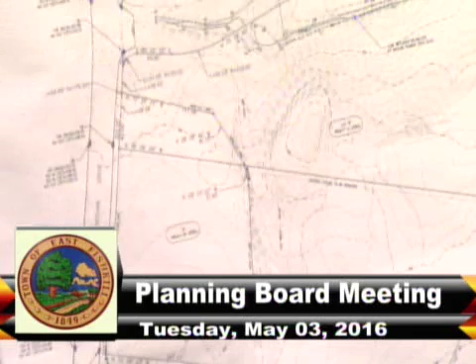All right, let's start over. This is the Brewmation project located off of Donovan Drive. This application actually has two parts: one is a lot line realignment, or subdivision, and the other is a site plan. What we're doing is modifying the lot line between two fairly large parcels, combined about 8 acres, into one larger parcel in the back, and then the Brewmation parcel in the front, identified on this map as parcel A, which is 1.35 acres. The lot line realignment portion is fairly straightforward. I'll move to the site plan.

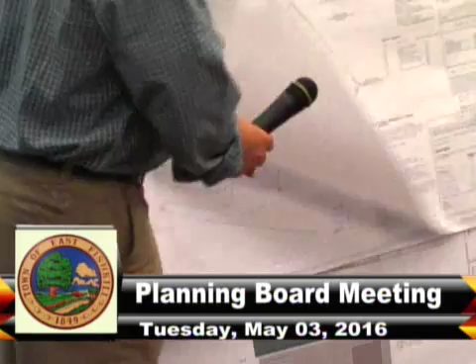If you recall, what we're proposing is a 5,600 square foot building footprint. And it's not totally two floors, there's a portion that's going to be a second floor with some office space and some storage. Altogether it's about mid 9,000 square feet, I think 96, I want to say.

Because of the use, Brewmation is a company that effectively fabricates and assembles controls for breweries. They have an existing facility in Fishkill and are expanding. That's why we're here tonight, looking to buy the property and move forward with their own building. It's a particularly low-use type of operation, and it fits very well with this zone, which is an industrial zone.

We had been before the board on a few occasions relative to the overall layout. We made some changes here and there regarding access and parking. We talked about the fact that while there's a requirement of 23 or 24 spaces, the reality is it's foreseen that it would only be 12.

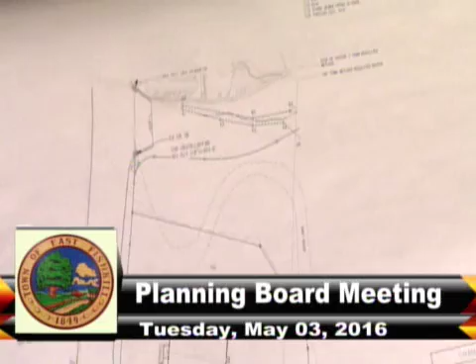One of the more significant changes we've had since the last time we were here was there was a concern regarding the overhead door and parking and maneuverability. Effectively what I did was take the parking spaces, which used to be perpendicular here, and turned them 90 degrees, pulling them to this side. So this opened up this entire area here.

Effectively, these spots in the middle and the spots over here are proposed to be banked. So while the pavement will be there, it won't be striped, which allows for more maneuverability for the truck. I think we're actually proposing one more space than we think we need, so 13 instead of 12.

So the issue was that there's no chance now that a car could be blocked from exiting by a truck, that was the concern. If it backed up here, we have the ability to actually run around the site, this perimeter here. So that kind of solved that issue.

Long story short, there were some comments from the planner and from the town engineer and traffic relative to making sure we had the maneuverability, the turning radiuses, things like that. I'll let Michelle and Joe get detailed into their latest set.

One of the things I do want to mention is one of the challenges that's been on this site has been the drainage. I want to go over that with you briefly to provide some explanation relative to the stormwater plan and why you don't have that yet.

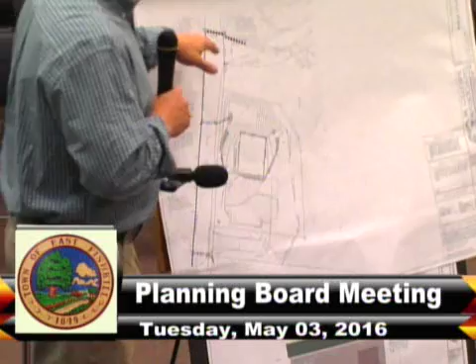As part of this application, we recall the change we made, we took this whole site and shifted it because the future potential access to the rear parcel is now on the southern portion, where before there was an existing right-of-way as part of a filed map on the northern end. There's a pretty significant stream and there are town wetlands up there.

So one of the reasons was to shift everything down to keep it outside the wetland, outside the buffer. The whole site sheets this way. The reality is the easiest way to take this water, once we treat it and discharge it, is to tie it into a location down where the previous future road was. If we do that, we get into piping, installing piping, and what happens is we are now in the buffer. The reality is now we need a permit.

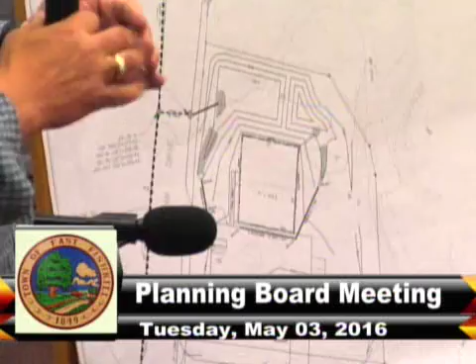What we've been tinkering with is actually taking this, treating the stormwater, bringing it through here, and tying it into this basin, which is located here. Our elevations aren't as great, and I don't want to get super technical with you, but we don't have as much elevation to work with, so it again becomes an issue of trying to play with the numbers and the modeling in order to tighten things up.

But I think one of the reasons we moved the whole project was to stay out of that buffer and stay out of that wetland. I'm confident we can achieve it, but we're still playing with it, and that's where that stands. So I wanted to provide an explanation as to why you don't have that. I know I've talked to Joe about it, we anticipate trying to get it together, but it also has to work.

Let me just ask, so I understand, you're going to use the existing pond, but that's just your outlet, so to speak. You're going to handle all your quantity requirements right here on site, but that just becomes your overflow or your discharge point. Right, there's our quality and our quantity on site.

We talked about one point, as part of the overall subdivision, there's a fairly significant pond located at the front of Donovan Drive. It would have gotten a little complicated to take that water down there, so what we're doing instead, this comes back here and discharges via 60-inch RCP, and then runs down through this stream, down through here.

So, this is the plan of attack, okay? And it keeps us out of buffering, and it's the right way to do it. So that's kind of it. I commend you for trying to protect the buffer and the wetland. Right, yes. Joe, you're good with that?

Yeah, actually, Mike and I plan to meet in a couple days to go over some more of these details, but what I'm hearing so far sounds like a pretty good approach. I think we're going to meet later in the week to go through further detail on it. So, yeah, I think from an overall project perspective, that's probably the best explanation I can give.

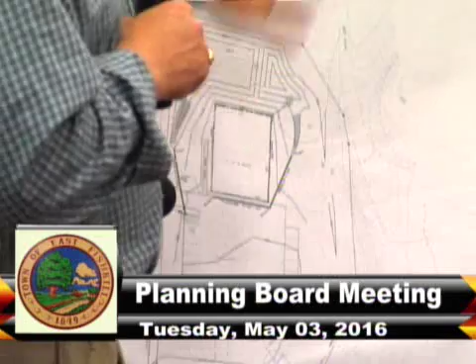When I say elevation, I have all the existing — as part of the overall survey, we took shots on rims, inverts, everything as current, as-built. The issue becomes, if I have an inlet at this location, there's only so far down I could bring this. So in lieu of getting my volume going deeper, I have to go wider. So that's why this is starting to sneak up in here, to try and provide that attenuation volume. This is my critical elevation.

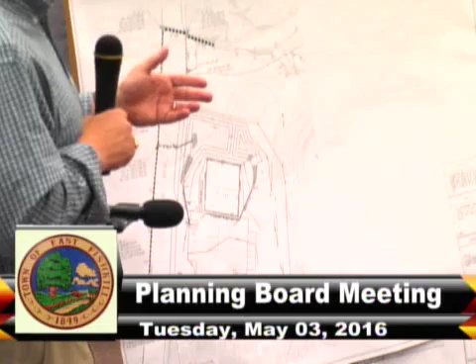Have you done any test pitting at the site? We did soil testing out there. Can you get infiltration there or no? That's part of this, but not a whole lot. The soils, believe it or not — this was an old gravel mine. Do you hit water if you go too deep? Yeah. And the groundwater elevation — there were signs of mottling and so forth when we actually did our tests, so we're constrained by that as well.

Okay, I have a note from HVA Engineers, from David Ellis, saying that all of the conditions and issues he raised have been satisfied. Michelle, any comments? At the last meeting we had asked the applicant to provide a lighting plan and a landscape plan, which they did, and they also showed the location of the sign. I just had a quick question.

It's my understanding that the first entrance is truck only? Correct. Okay, so there's going to be like a truck-only sign there, and then theoretically people will drive in Donovan Drive, and the sign to the actual facility will be at the second entrance, so they know to go in there as their entrance. Correct — deliveries only sign, I would imagine. I think deliveries only is for the first entrance, right?

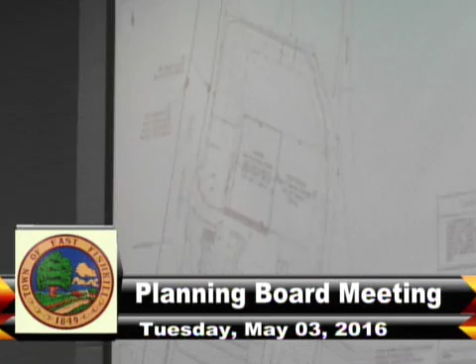And it'll be signed accordingly, right? Deliveries only. And we actually have provided indicated signage on that plan. I think David had indicated maybe changing some of the language on that sign to make sure it's clear whether it's delivery or truck traffic only, whatever it may be, but it's designated as one way in, and then it has to be limited to truck traffic, and obviously do not enter from the other side. So whatever works to satisfy it.

And then they showed a bank of white pines essentially between the daycare center and the driveway, and then some other additional landscaping up front at the building. So all good. Joe?

Yeah, some of these Mike and I covered before. I guess one question I have, though — Mike, the plans you're flipping through there, are those the same as what was submitted to the town, or have you done more work on them? They look slightly different. I think the only thing that's different is on that grading plan, because we've been tinkering with it — nothing else has been modified, but the grading at the pond location has changed a little bit, elevations-wise, grades-wise. In terms of the parking lot, it's the same that you saw.

Our letter goes over a few of the items that he did address, in terms of making specific reference back to the original site plan for Donovan Drive, which is something we asked them to do. They also addressed some circulation and truck movement comments, and included information on environmentally sensitive lands — it looks like he's got way more area than what's necessary between the two lots. They clarified some information on the access easements, and on stormwater, Mike and I will go over that in detail as we get the SWPPP put together.

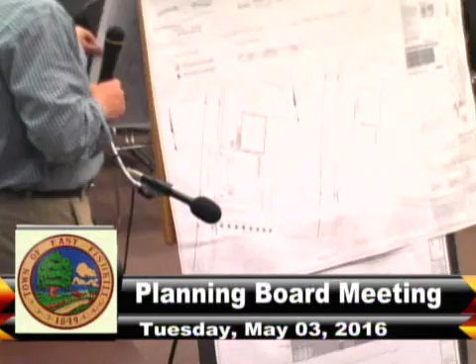As far as the driveways, that two-way main driveway, we were asking to show it in relation to the other driveway to the daycare facility. You have some drainage, a catch basin, and utility boxes right in that corner, and by the time you remove the existing curb and put in the new curb, you might end up disrupting those existing features. So we thought about shifting it a few feet to the north to avoid any disruption.

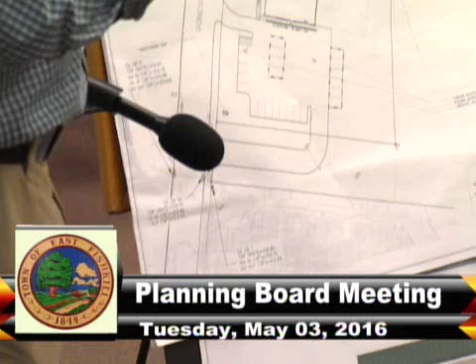The luxury we have here is an extra 10 feet to play with, since this area is actually 60 feet wide. I understand, I did talk to Joe about this, it does get a little tight. Once you lay the radiuses in there, the entrance to the daycare sits just to the south, so once you lay the radiuses and tangent pieces in, it starts to get a little tight. There's also a catch basin here we'll have to adjust to make it work. So to move it even a couple of feet is not a big deal, in order to gain that separation it's really a detailed construction type of thing.

And that's all you're looking for? Yeah, it was just to make it easier for construction more than anything. He kind of centered it right in the middle of the right-of-way, and like you said, he does have a wider right-of-way there. He could shift it a little bit, or at least angle the first entrance part so it's not affecting what's already out there.

Let me add to that - are you planning on putting in a raised concrete curb at the entrance? The concern is with that box sitting just behind it, a raised curb will help protect it to some degree versus just pavement. Yeah, in terms of the site next door, I believe they have curbs. The idea is to get just a drop apron, curb through the front of the apron, but there's not a curb that goes into the school.

The intent was, since this is the main entrance to the facility, to provide for a concrete curb in there, because that would help protect the utility there. Otherwise, you'd have to come up with something else to help protect the bollards.

So are you guys in violent agreement here? Yeah, I think we're fine. It's just that box too - it was shown by the surveyor, but I want to make sure it's correct in terms of dimension, because it looks very big on this plan. It may not be that big, but I think the location is pretty accurate. Right, and I would assume that it would be.

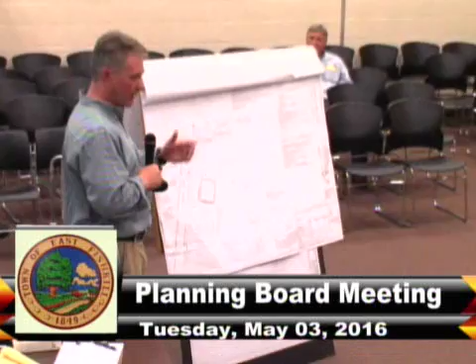So to get an exact measurement on that, because I actually show just the hair of the curb actually tucking - I think we just want to be a little conservative, because with the heavy tractor trailer movements through there, obviously you don't want to be too tight to it.

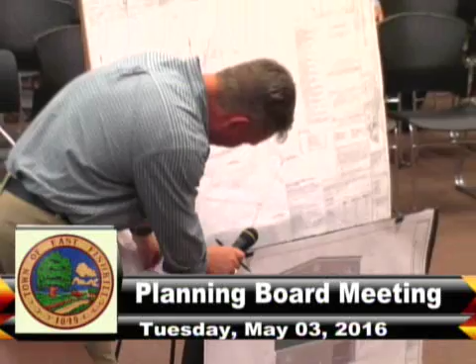Are they shown on that color elevation there? I think the idea for the wall packs was just at the entry locations. Okay, so not on the wall that's facing the wetland, because I was going to ask you if it was going to go on there, to only put it on motion sensor on that wall. Nothing's facing that area, there's no access, there's no entry, there's no anything.

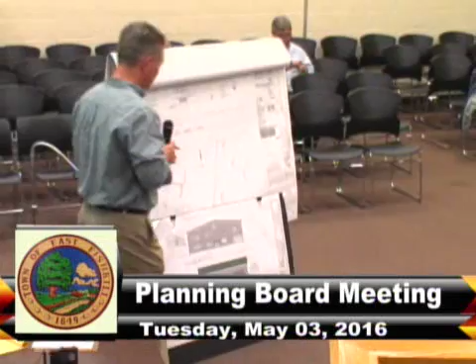So, comments from the board? Sorry, I should have made... have a need for one. I'll write you each an apology note. Okay, so no comments.

No comment. I think that is pretty much the list of issues we've covered that were raised in the first public hearing, or at least a public discussion. So given that, given the fact that there's no one here, I would like to close the public hearing with the condition that says you and Joe continue to work, and the clock does not really start. The 62-day clock does not start until some agreement has been reached on the SWPPP.

Is that... That's fine, that's the board's prerogative. I think what happens is, once it closes, the 62-day clock kind of clicks off, so it's got to get done. Can we agree to an extension if it's needed? I would.

Okay. Do I have a motion to close the public hearing? So moved. Second. All in favor? Aye. Okay, so why don't we do the following?

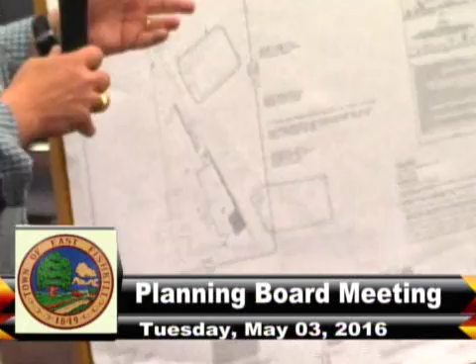There, I recognized some conditions, or some operations let's say, of the existing site based upon a look and a review of the approved site plan. There is an approved site plan on file with the town of East Fishkill relative to the site. It goes back to the 80s, mid-80s. But to see if there's conformance and so forth, and a couple things were brought up.

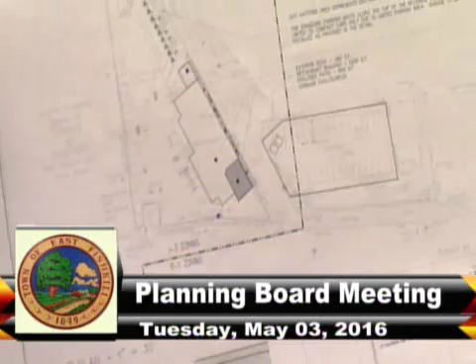So over probably the last few months, there's been some discussions between the applicant and representatives of the town. And in fact, last meeting, the owner presented this project to you to get the board up to speed relative to what's being proposed. So yes, there was a meeting held earlier this week. And what I'd like to do is just go through some of the hot button issues, just so the board is clear about it, and then we move on.

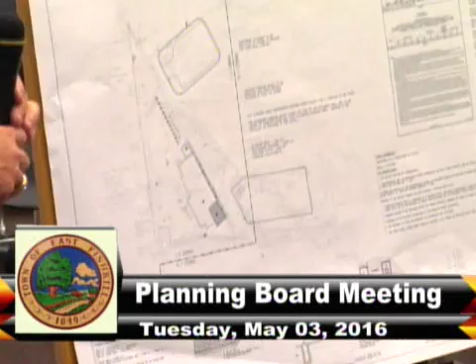So we're all familiar with the site. It's Daddy-O's. Officially, ownership is DKK Corp. There's an existing restaurant, patio, and other accoutrements.

What happens is you enter the site coming off of 82, come past the restaurant, with parking on the right and left. As you make your way around the peak where there's the entrance to the rail trail, if there's no parking on the main site, there's an auxiliary site also part of DK's ownership, which exists right here. So this all exists, as well as this.

I want to make reference to another parking area that's actually shown on the approved site plan, approved back in the mid-'80s, which is this location here. I thought it was important to reference because it was part of the approved plan. It's not currently used as parking, but it certainly does exist on that plan.

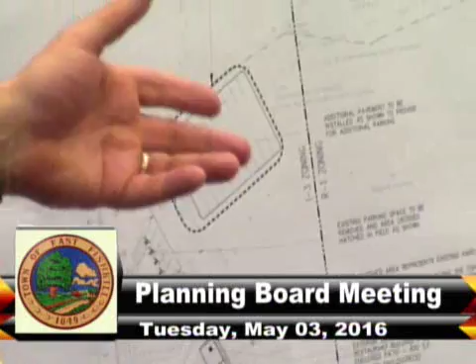I provided the information relative to the date of the plan and the date it was signed, just for reference purposes. I understand the parcel next door was subdivided a few years ago, and some work was done relative to layout. It wasn't identified on that subdivision plan that this existed, so for clarity we wanted to place it on this plan.

That being said, there's also parking that exists along Turner Street. If you work your way to the top of the site and take a right, there's a small retaining wall, so people coming off of Turner Street just kind of nose in.

What we're proposing is to maintain these spots, but actually turning them a little bit, so we provide some assurance that the back of those vehicles are not on the town right-of-way, believe it or not.

Turner Street is a town road. There have been issues in the past relative to parking along Turner Street. I think one of the things expressed by the town last night is to provide some assurance that emergency vehicles can get in and out of there. There is an existing home that exists in the back.

So as part of the enhancements of this site, we're showing a reconfiguration of these parking spots. We're limiting it, and we're going to provide some handicap spots, which the site desperately needs. We're also limiting the additional spots to compact cars, so we keep it short.

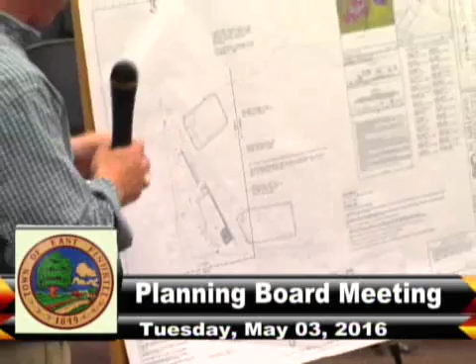So are you saying all that parking up there is going to be compact? It's either going to be handicapped—the first handicap spaces go to 4—and then compact from here around.

The reason for this is that there's an edge of pavement or some kind of line, and the property line is a bit closer, so we don't have that full depth of parking space there. That's the reason why we're turning them.

So now we lose the ability of some spaces, but we provide some assurance that the parking spaces are on the property and not on the town property.

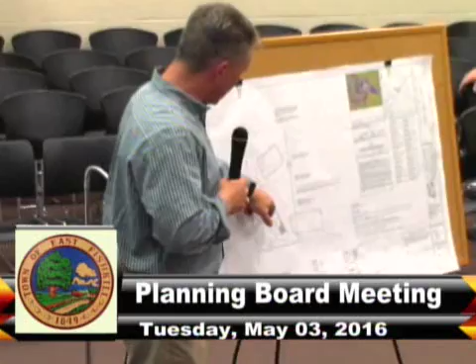In addition, on the back side of the restaurant, we're showing a 5-foot width area for a fire lane. There has been a tendency, especially when we have the combination of the restaurant being open and the rail trail as well.

The owner has been very open in terms of allowing, and may even have a formal agreement with Dutchess County, allowing for parking at the head of the rail trail here. But there are times when cars are parked along the edge of the building. So as part of this, we're showing a fire lane from one end of the building to the other, in addition to showing 5 no-parking-prohibited signs.

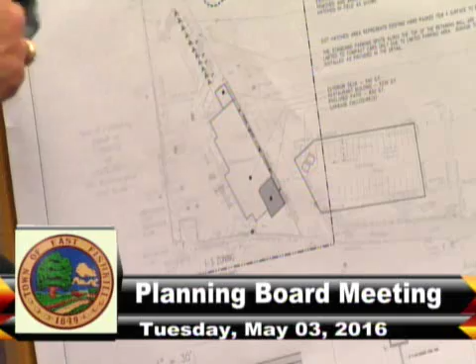There are existing no-parking signs on the northern side of Turner Street, and then it particularly becomes an enforcement issue, I guess, for the town to make sure that happens. So we take a look at everything.

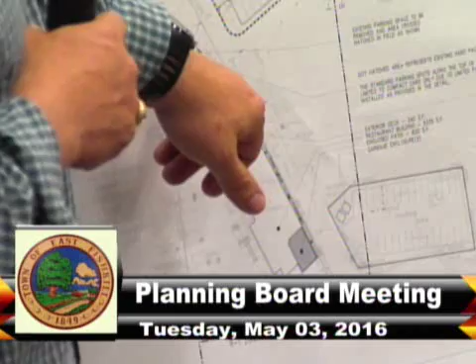I will back up. There is a parking space on the end here, and as part of working with Michelle to try to optimize the site with what we have, we're actually removing a parking space at the extreme northern end to allow for some greater width.

I've been to the site a number of times, and while I've never had an issue getting through there, it does get tight. So that should open that up a little bit.

So we ran some parking calculations relative to the space, and effectively, the on-site spaces we provide here are 77. Does that include the additional lot? No, just the onsite, not that lot. The 77 does not include that one, but does include the other one, the southern lot.

I think it would have to, this site, yeah, along with the site which the owner owns and is part of this site plan, total 86 spots. We determined, Michelle and I going through back and forth, that the site parking demand is 94.

So again, that's the main site as well as this auxiliary parking area, not including the previously approved site plan with parking spaces that really don't exist today.

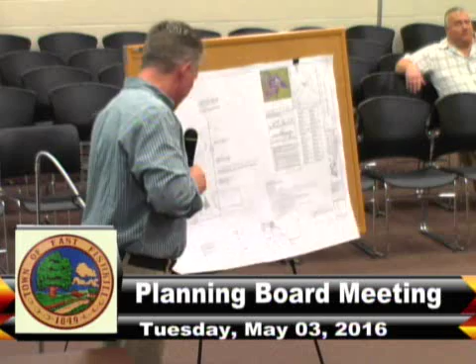So effectively, at the end of the day, we've added some spots in key locations, we're extending the pavement out, everything is proposed to be restriped. This area along the top of Turner Street is all proposed to be paved. In addition to signage, we're talking about providing barriers. Right now there's just railroad ties there, which may not do much of anything. So I think, all things considered, we've optimized the site parking as best we can for what exists.

So at the end of the day, it would require, from this board, a waiver of 8 parking spaces.

Yes, and then also an agreement that they can go down to a smaller size for the compact cars. There are just a small number, maybe 4 or 5, that have gone to 9 by 18 instead of 10 by 20 at my recommendation, because I felt we could go to 9 by 18 on some spaces as long as we restriped. I was feeling that perhaps because of the way it was striped out there, they were losing some parking spaces to sloppy parking, people just not parking. And 9 by 18 is a very typical parking space size.

Okay, Joe, any comments? No, I don't have any comments. Tom, any comments?

Well, I think there's an effective way to resolve the problem: this property owner bought the site, and the approval with the site plan included another space, which when that property came before this board for subdivision, that parking lot was never shown. So it's kind of a catch-22 this property owner finds himself in. I do think the adjustments to the site, as well as the waiver of those couple of spaces, is appropriate, since it's an existing site, and through no fault of the current operator, the site plan problem arose.